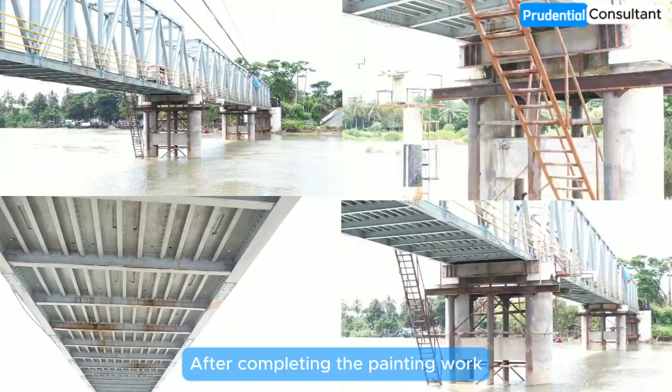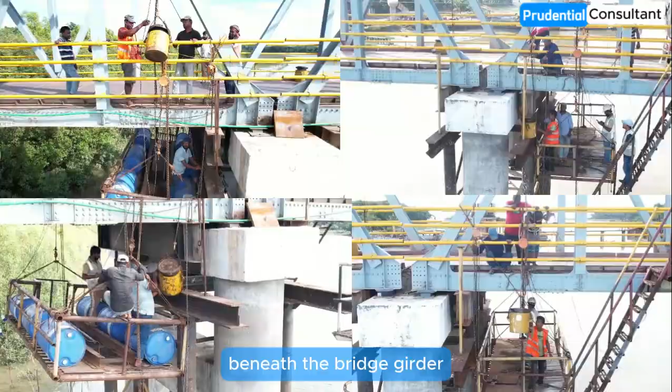After completing the painting work, all the deformed and damaged bearings begin to be replaced to restore the functionality. The replacement process begins with the installation of hydraulic jacks beneath the bridge girder. Load calculation has been carried out to determine the capacity of hydraulic jack to lift the bridge.

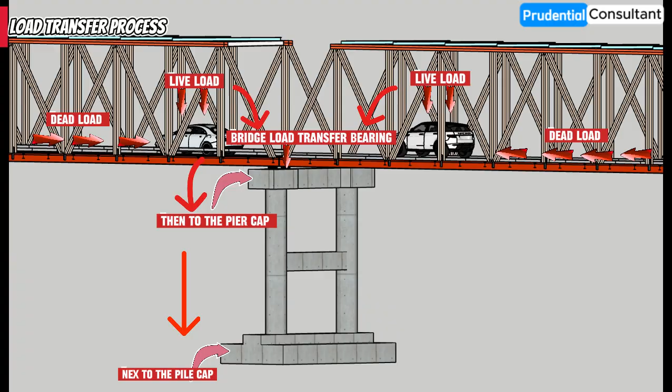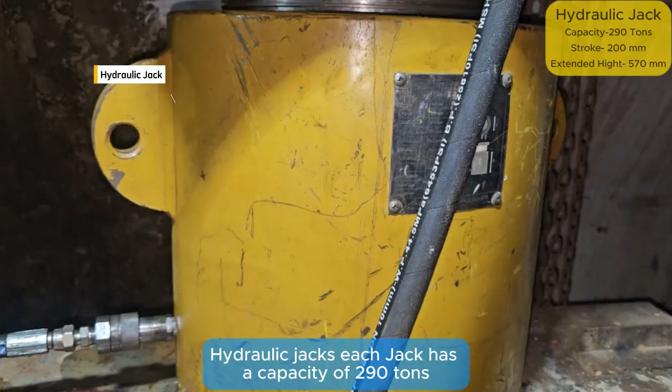The load transfer system of Reju Khal Bridge. The new support system developed by Prudential Consultant for bearing replacement. The bridge span will be lifted by 4 powerful hydraulic jacks. Each jack has a capacity of 290 tons and can raise the span by 25 to 100 millimeters as required.

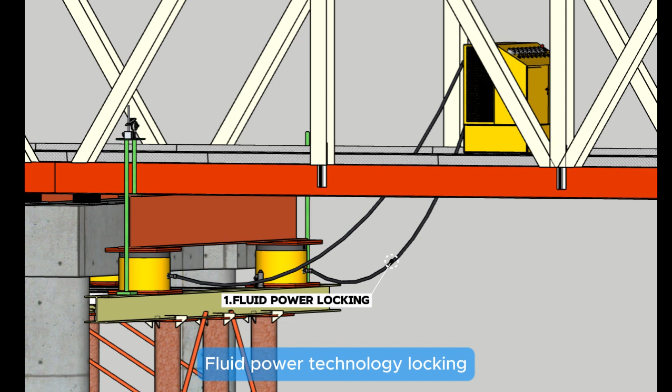The lifting is performed simultaneously on both sides, controlled by a synchronized lifting system, which is a German technology. 4 types of security measures have been taken as precaution. Fluid power technology locking assists the jacks in holding the span in the correct position, lifted by a fuel-powered hydraulic pump.

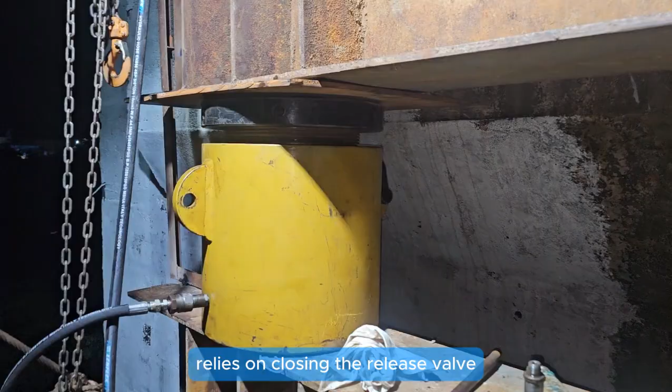Manual locking system on a hydraulic jack relies on closing the release valve and using the internal hydraulic pressure to hold the load of the lifted span. For additional load-bearing capacity, 3 mechanical jacks are also attached to the I-joist.

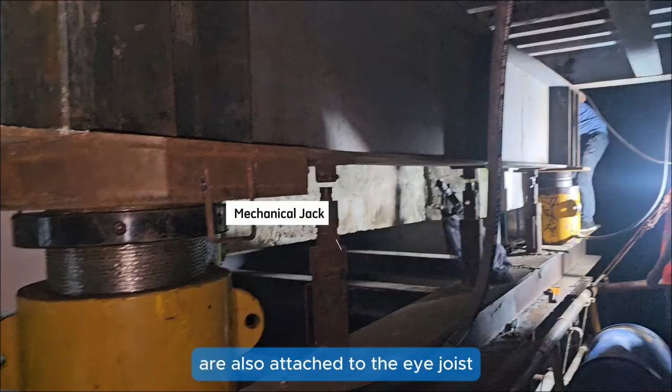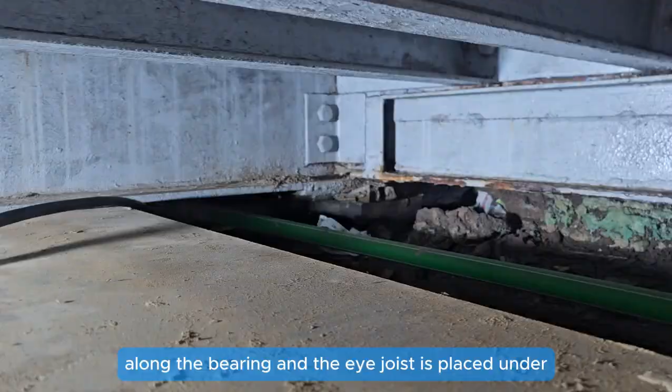For avoiding lateral force, extra support is added at both sides of the pier. The jacks are carefully placed under the I-joist along the bearing, and the I-joist is placed under the main girder. The hydraulic jacks are linked to the hydraulic pump through hose pipes. Dial gauges are installed at selected points to measure the displacement with precision.

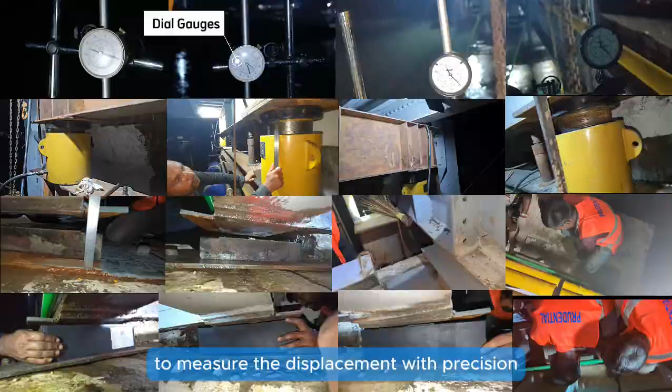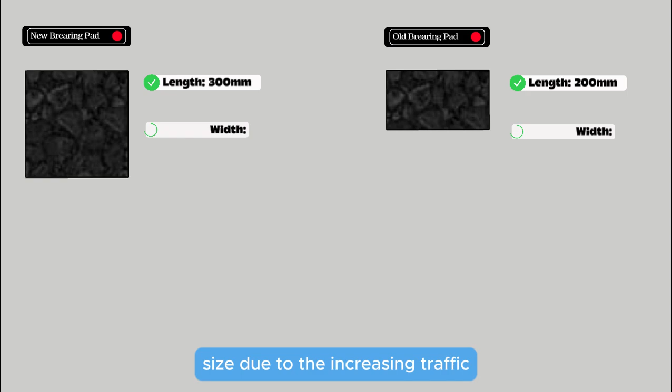For safety reasons, the road is closed before the operation begins, and the work is usually scheduled at night to reduce traffic disruption. The new bearing pad is larger in size due to the increasing traffic. To fit it in position, since it is not possible to increase the size of the bearing seat by lifting the bridge for a long time, steel plates have been anchored at the top and bottom side of the bearing.

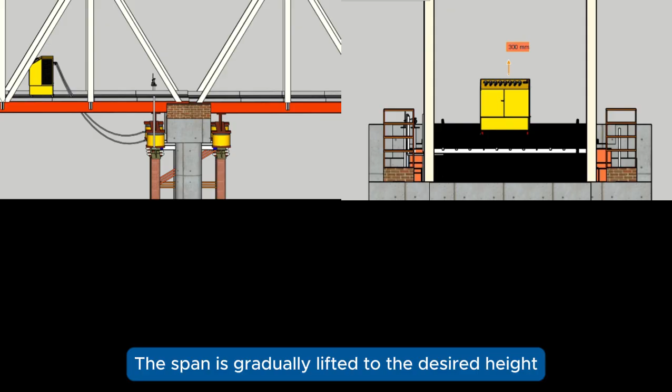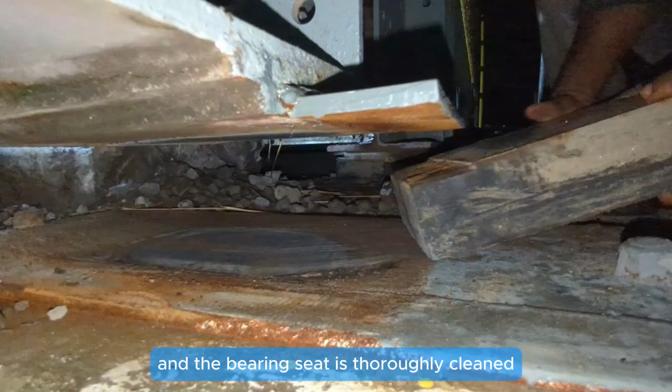The span is gradually lifted to the desired height. At this stage, the old bearing pad is removed, and the bearing seat is thoroughly cleaned with wire brushes to ensure a clean surface. The new bearing pad is installed beneath the girder with exact dimensions to ensure a perfect fit and proper support.

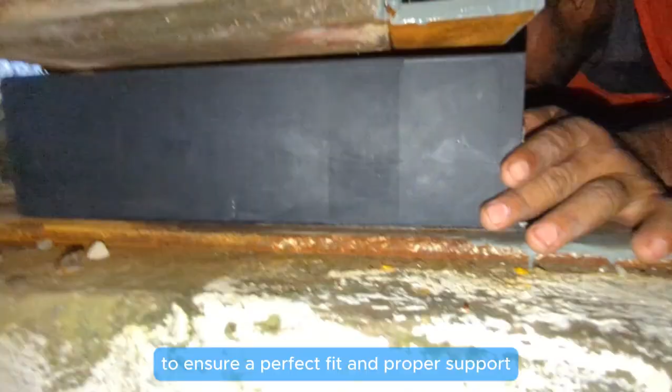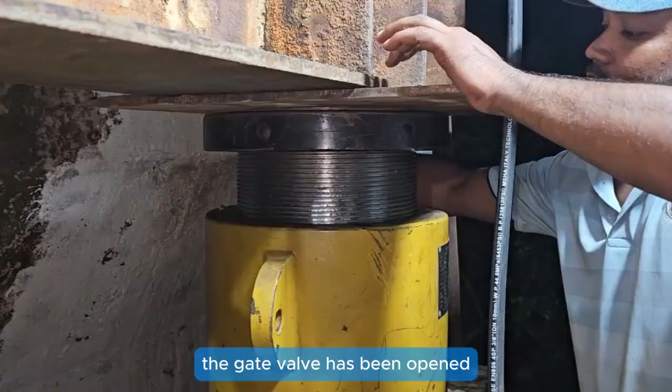This new bearing has been tested and certified by BUET and checked by the Bridge Management Wing. The project director visited during the installation. After installation, the gate valve has been opened and the pump is restarted. The jack's lock is disengaged and the span is gently lowered by releasing hydraulic pressure.

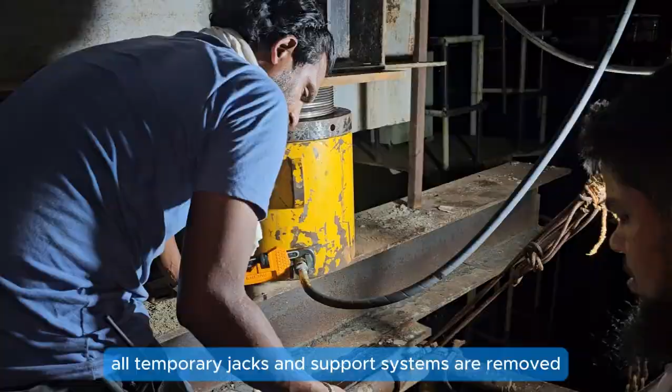In the final stage, all temporary jacks and support systems are removed. The bridge is reopened to traffic, now strengthened with new bearings. This careful and systematic process guarantees that the structure remains stable, durable, and safe for long-term service.